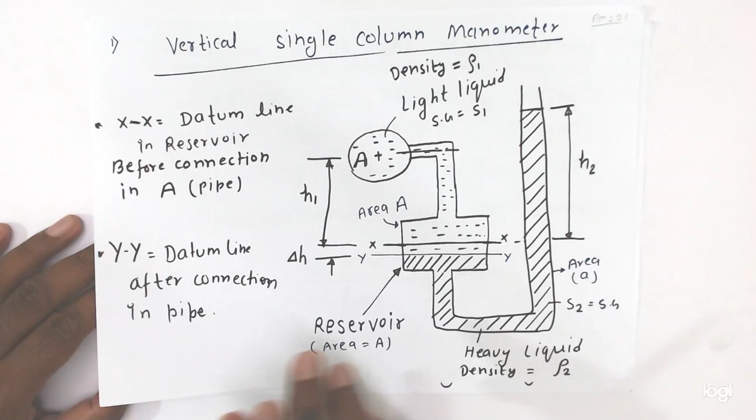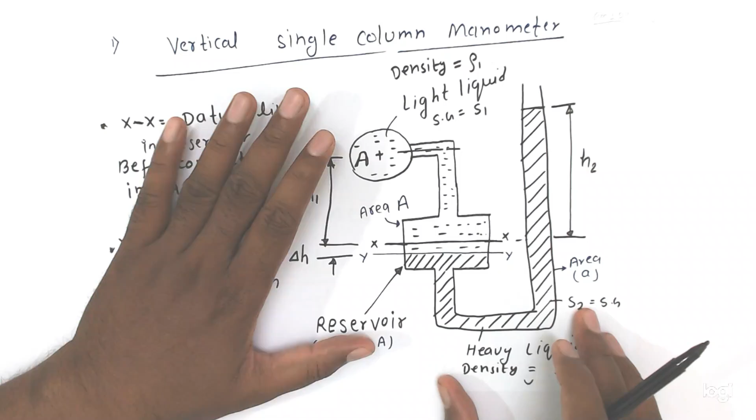Friends, this is the single column manometer. In this, आप देख सकते हैं, this is the pipe, connected to a reservoir, and it is like this. Friends, this is the modified version of U-tube manometer, this is the U-tube manometer.

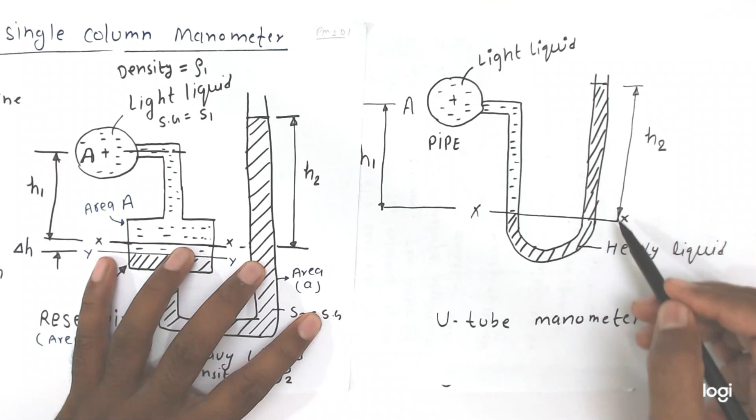From here you can see this is the U-tube manometer. This is the pipe which is connected here. This is the light liquid, this is the heavy liquid. Like this arrangement is there.

This is U-tube manometer. Friends, for accurate measurement or precision measurement, we are using this single column manometer, and it is the modified version of U-tube manometer.

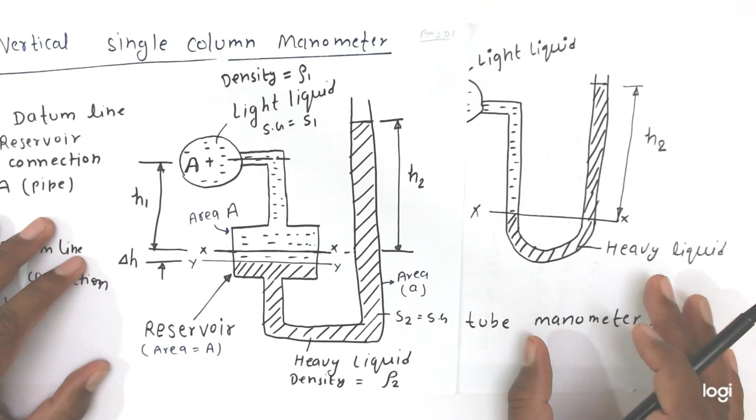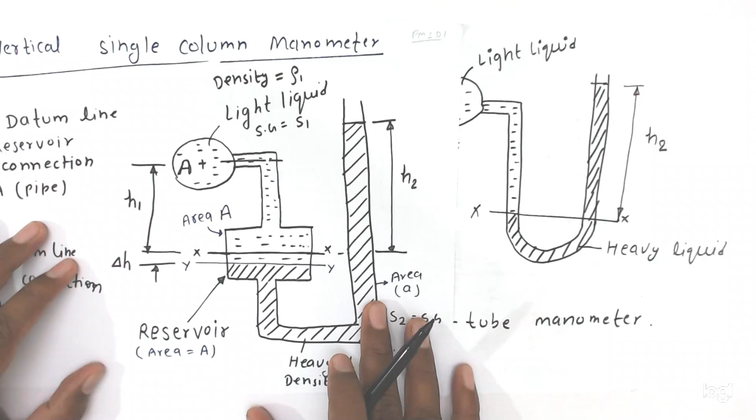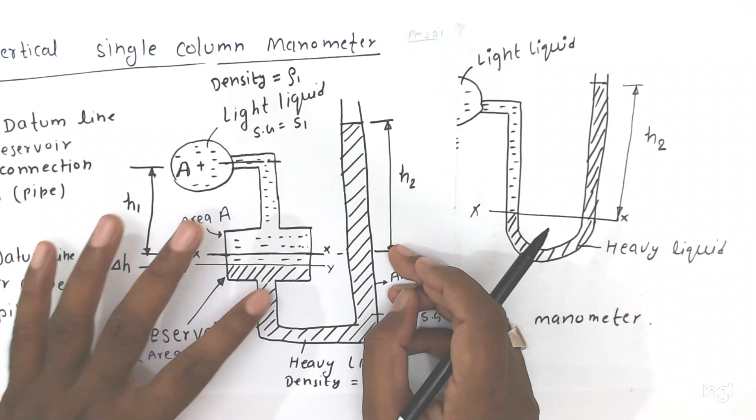Here what happened, friends, we will fix one reservoir like this in the left limb, and right limb is like this only. क्या होगा, पाइप से एक लिम्ब में एक रिजर्वायर फिट कर देंगे जिसका एरिया राइट लिम्ब की एरिया के अप्रोक्स 100 टाइम्स या मोर देन 100 टाइम्स होता है इस रिजर्वायर का। ओके फ्रेंड्स, सो दिस इज द सिंगल कॉलम मैनोमीटर।

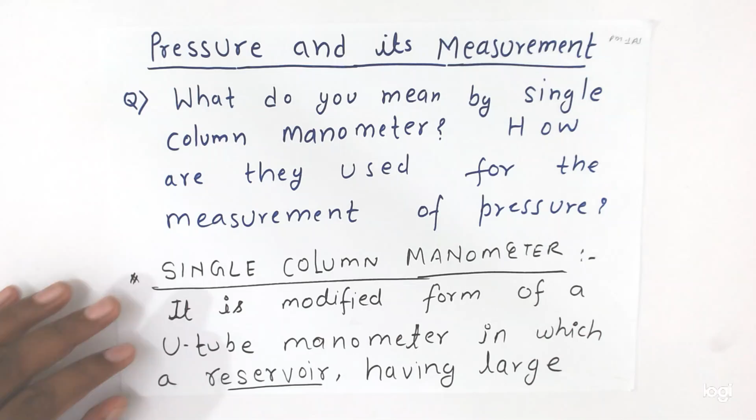नाउ फ्रेंड्स, वी विल अंडरस्टैंड हियर। इट इज द मॉडिफाइड फॉर्म ऑफ अ U-tube मैनोमीटर में जिसमें एक रिजर्वायर जो large cross section, more than 100 times as compared to the right limb or other limb, is connected। ओके फ्रेंड्स, due to large cross section लगाने से क्या benefit होगा?

Due to large cross section area of the reservoir, for any variation in pressure, the change in liquid level in the reservoir will be very small। फ्रेंड्स, अगर हम इसका एरिया बहुत लार्ज कर देंगे तो अगर कुछ भी चेंज होगा तो इस कॉलम में जो चेंज इन प्रेशर होगा वो बहुत ही कम होगा।

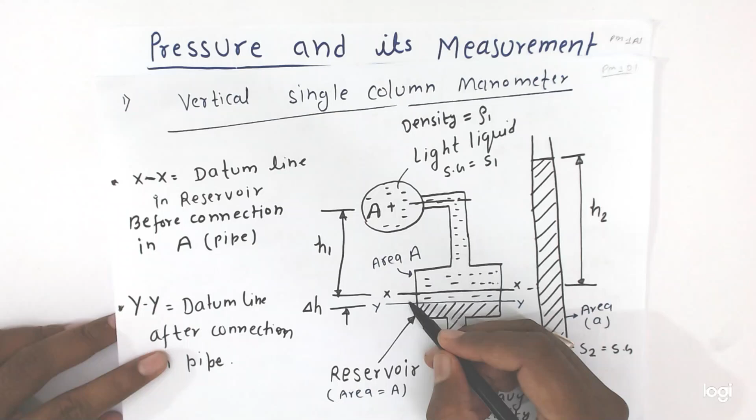ओके फ्रेंड्स, यहाँ पर जो लिक्विड लेवल का वेरिएशन होगा वो बहुत कम होगा इन द रिजर्वायर, द चेंज इन द लिक्विड लेवल इन द रिजर्वायर विल बी वेरी स्मॉल which may be neglected, and hence the pressure is given by the height of liquid in the other limb।

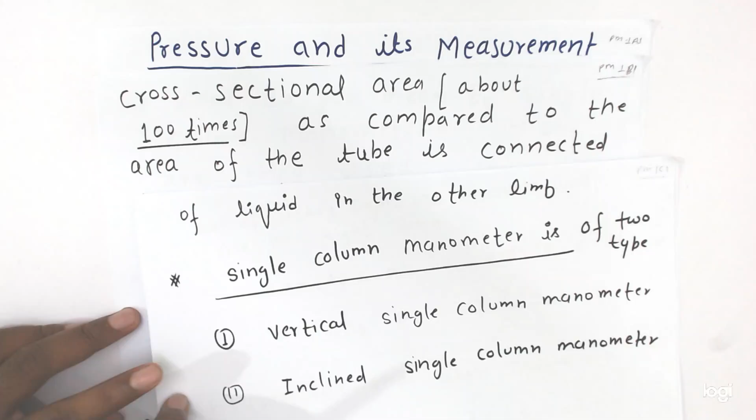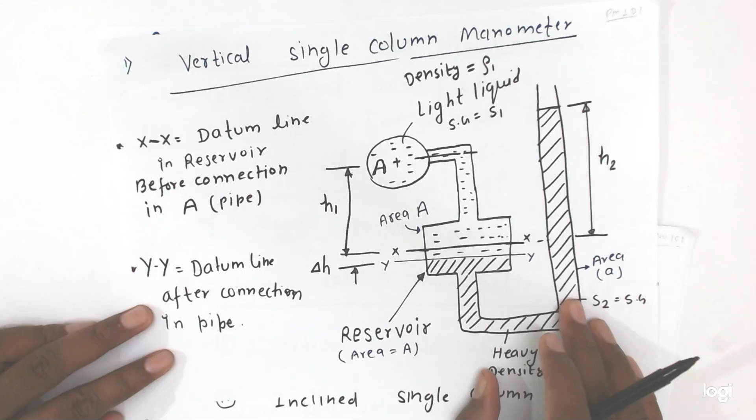फ्रेंड्स, क्या होगा यहाँ से कि इस केस में जो हाइट होगा वो बहुत ही कम होगा, चेंज इन लिक्विड हाइट वेरी वेरी स्मॉल, सो वी कैन नेग्लेक्ट इट, एंड जो भी प्रेशर होगा वो इसके द्वारा हम कैलकुलेट कर लेंगे। सो दिस इज द एडवांटेज ऑफ दिस सिंगल कॉलम मैनोमीटर।

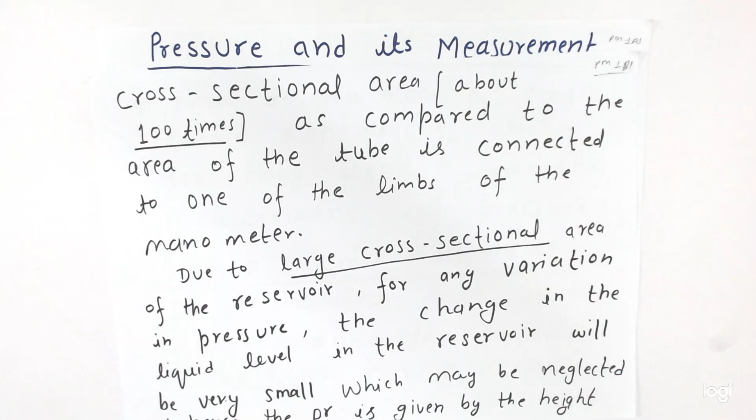ओके फ्रेंड्स, दिस इज ऑफ टू टाइप्स। Single column manometer is of two types। One is vertical single column manometer, and this is inclined single column manometer।

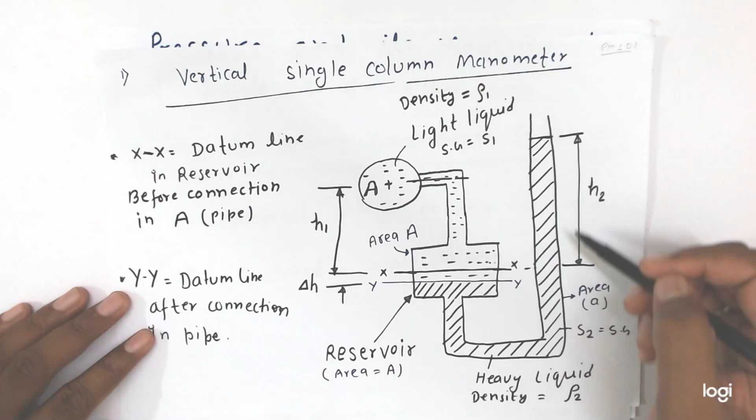So friends, this is the vertical single column manometer. In this right limb is in vertical. फ्रेंड्स, इसे हम प्रेशर मेजरमेंट कैसे करेंगे? Let's suppose first we are not connected this part to the pipe.

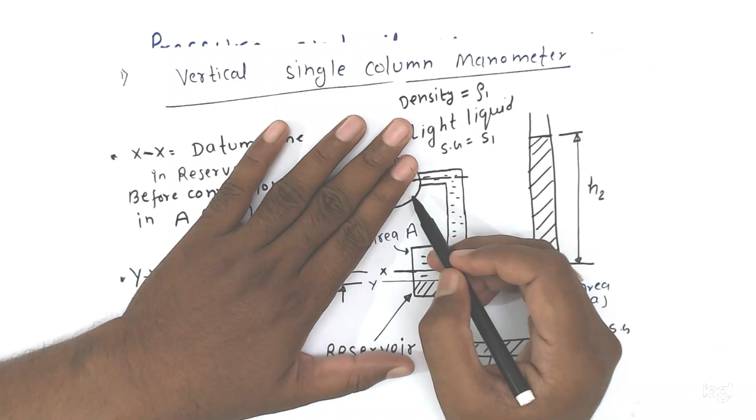So in this case, whatever bottom line is there in the reservoir is XX before fixing into the pipe. Okay friends, we are not fixing anything. So before fixing, whatever level is there, this bottom line is there, it is XX.

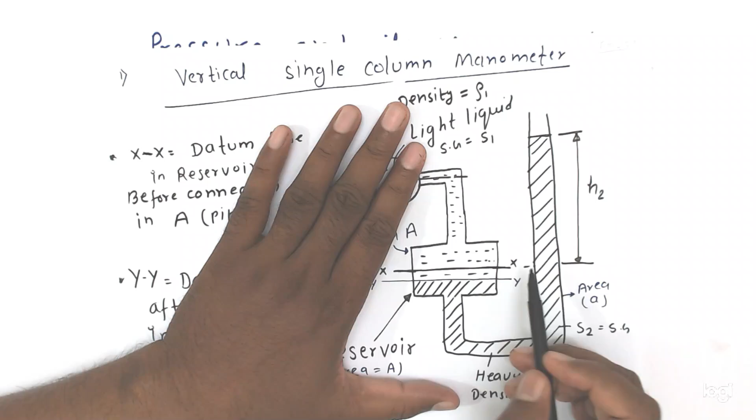Now friends, this part is connected to this pipe. In this case, due to the pressure of the liquid, this level will go down, and because of this, whatever liquid rises there, it is H2 in the right limb. So XX is the datum line in reservoir before connection in pipe, and YY is the datum line after connection in the pipe.

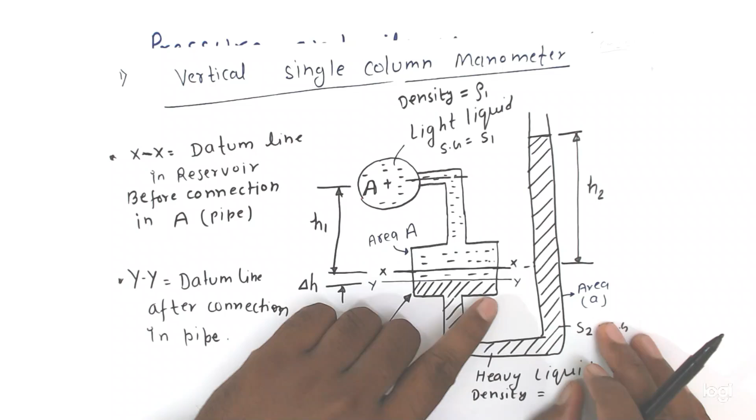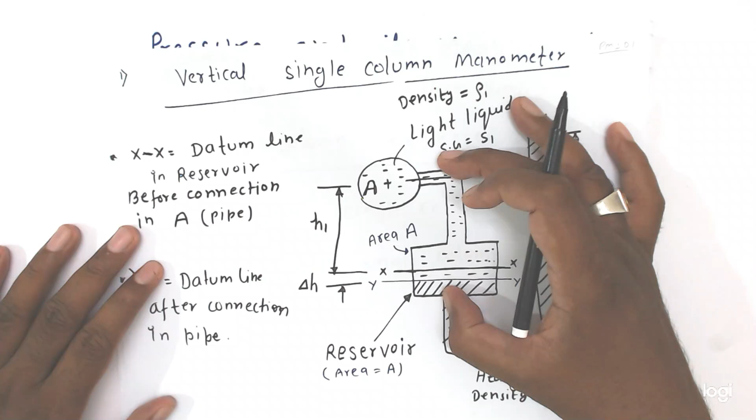So इस कनेक्ट करने के बाद जो हमारा डाटम लाइन आएगा वो YY होगा। फ्रेंड्स, प्रेशर कैलकुलेशन कैसे होगा? Whatever pressure is in the left limb, that means pressure is in the right limb. So friends, this part is also delta H।

ओके फ्रेंड्स, now see here, whatever fall is there, जो वॉल्यूम डिस्प्लेस होगा यहाँ पर, सेम वॉल्यूम राइज करेगा। इट मीन्स यहाँ से जो वॉल्यूम होगा वो डाउन होगा, और उतना ही वॉल्यूम इधर राइज करेगा। इट मीन्स फ्रेंड्स, यहाँ पे area into delta H equal to whatever area is there in the right limb into height H2।

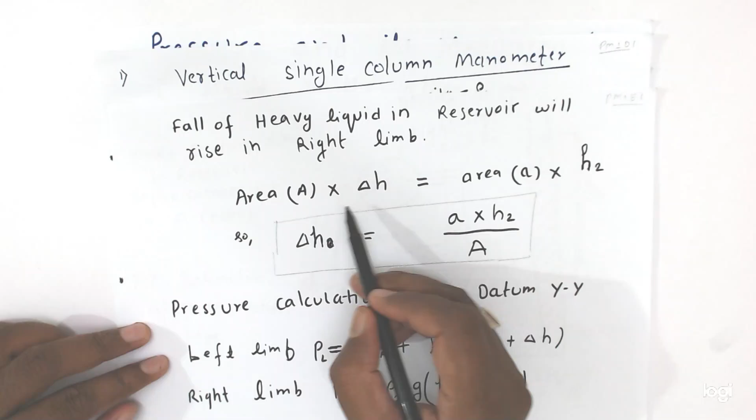Okay friends, so this is the concept here. So fall of heavy liquid in reservoir will be rise in the right limb. So area into delta H equal to this small area. If small area of the pipe is A and here area of the large reservoir is A, so इस केस में क्या होगा फ्रेंड्स, A into H2।

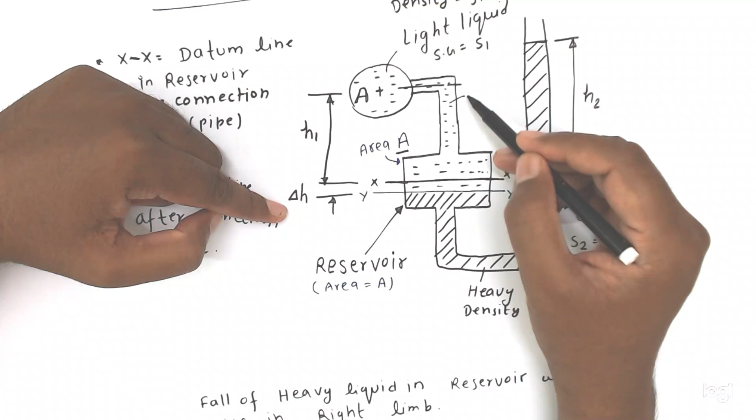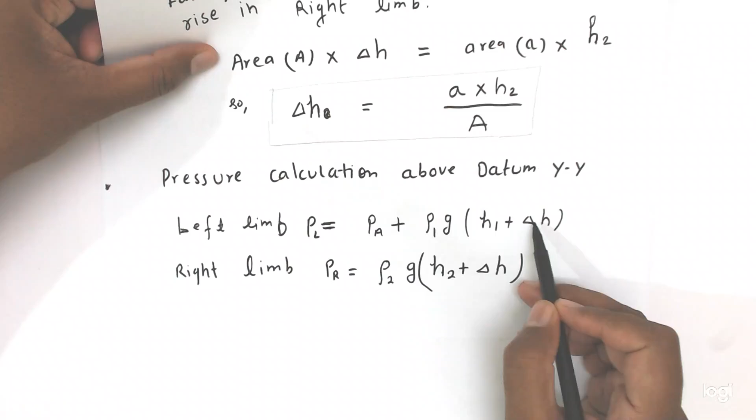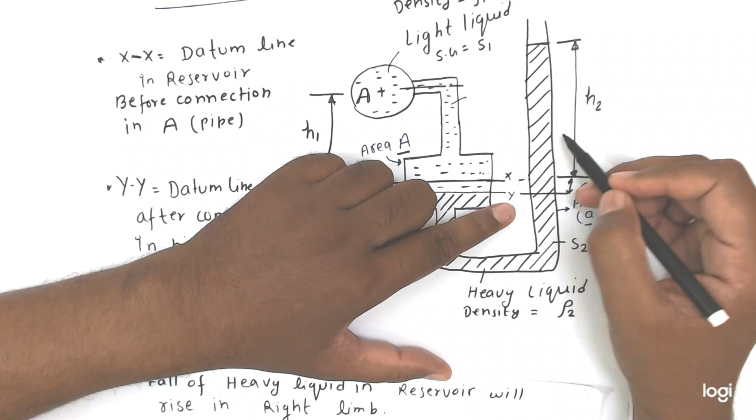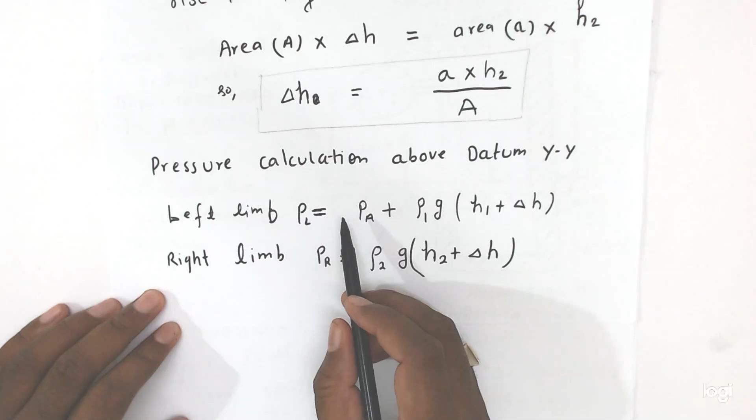If density of this liquid is ρ2, so ρ2 G into H2 plus this also height, because this is the datum line we are considering, so delta H plus H2. Okay friends, so right limb pressure is equal to ρ2 G H2 plus delta H. Okay friends, now this both pressure is equal, so we will equate this one.

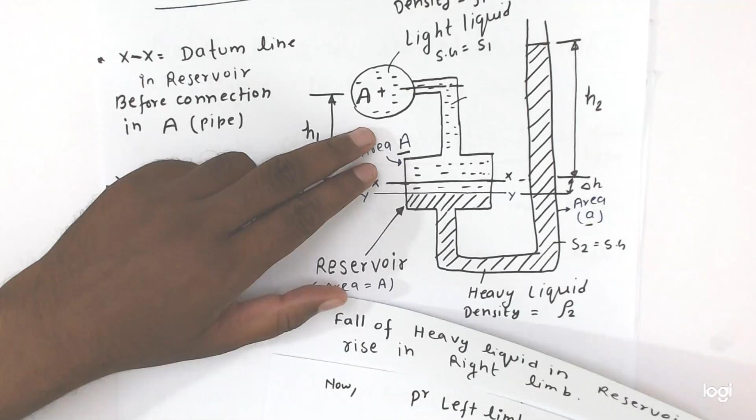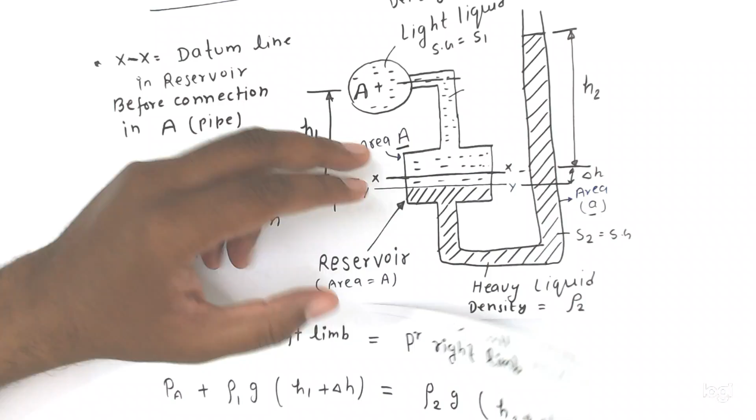So from here we can calculate the pressure in the pipe. So from this we can calculate the pressure in the pipe. Now friends, suppose this area of reservoir is more than 100 times compared to this area in the right limb. So friends, this a by A ratio is very small.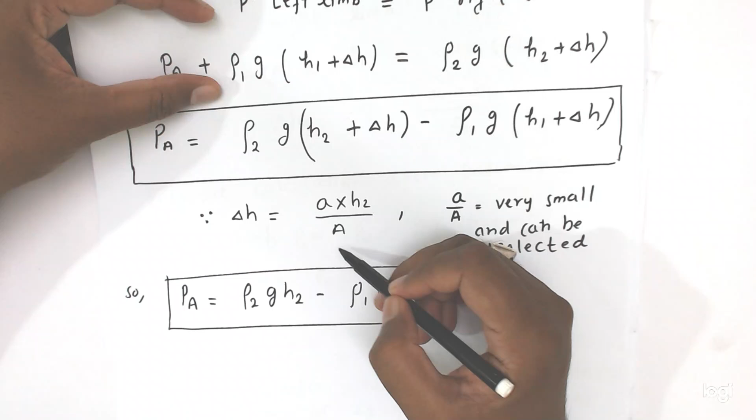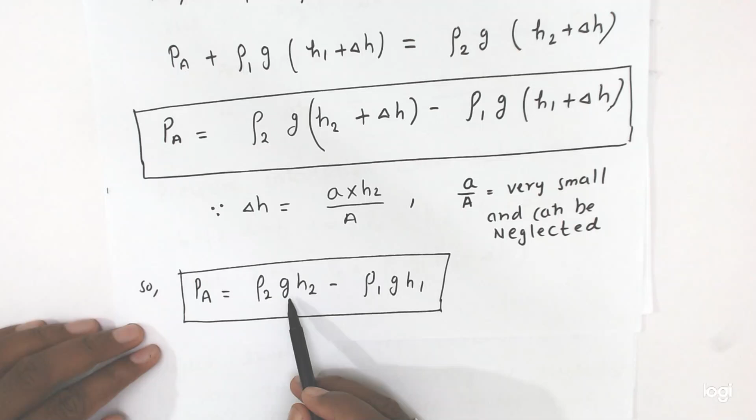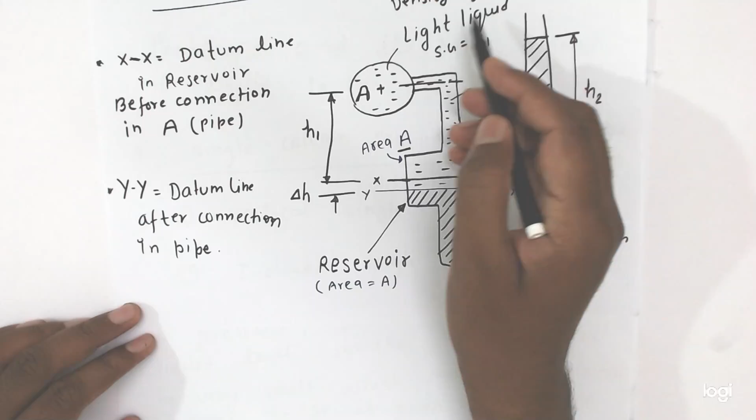ρ2 G H2 minus ρ1 G H1. So by this we can calculate the pressure in the vertical single column manometer. Okay friends. Similarly friends, one more is there. This is the inclined single column manometer. So similar case friends, this right limb is inclined.

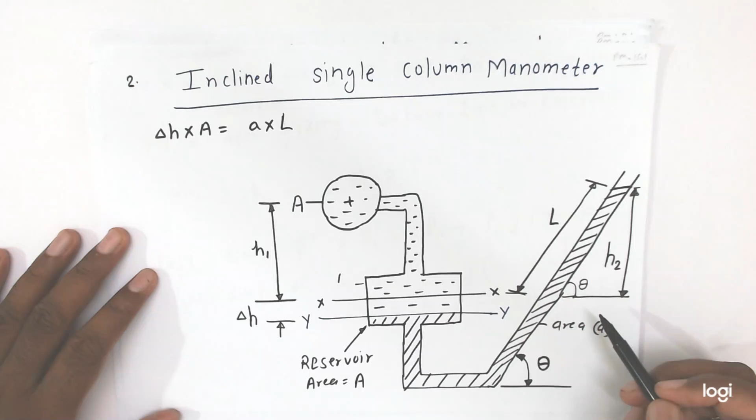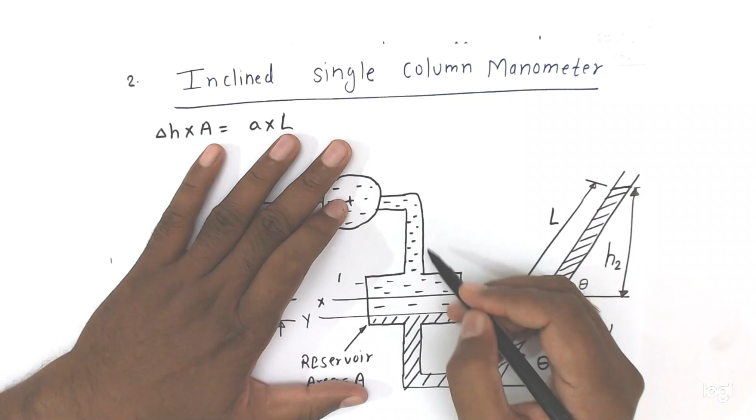This setup is same. This reservoir is in the vertical limb, left limb, and this is the inclined. We are taking this one friends because this is more sensitive and it is giving more accurate results. So here similar case friends, before connecting to this pipe, the datum line is xx, and after fixing this pipe, because of the pressure of the liquid, the new datum line is yy.

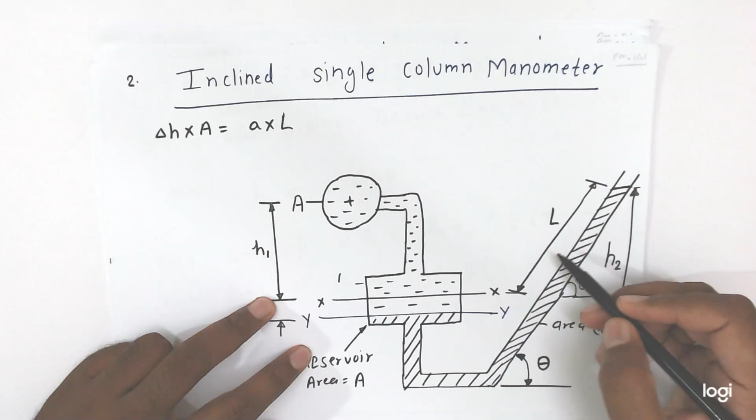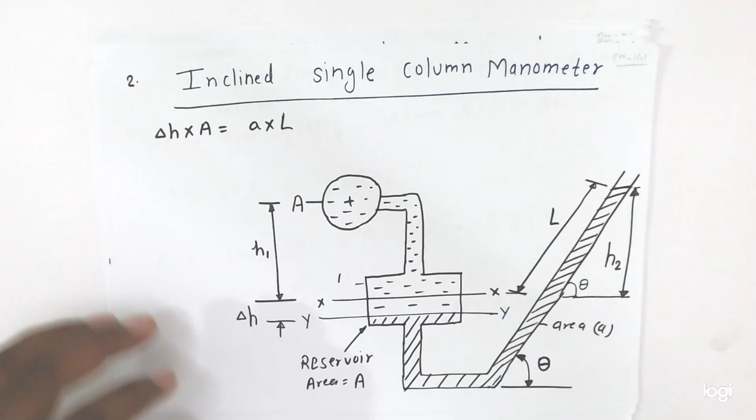Okay friends, this is the delta H. From here the height is h1, and this is inclined. Because of this incline, this length is L, and if you take the vertical height, it is h2. So similar case friends, from here we are able to calculate the pressure. The concept is that this h2 height is equal to what?

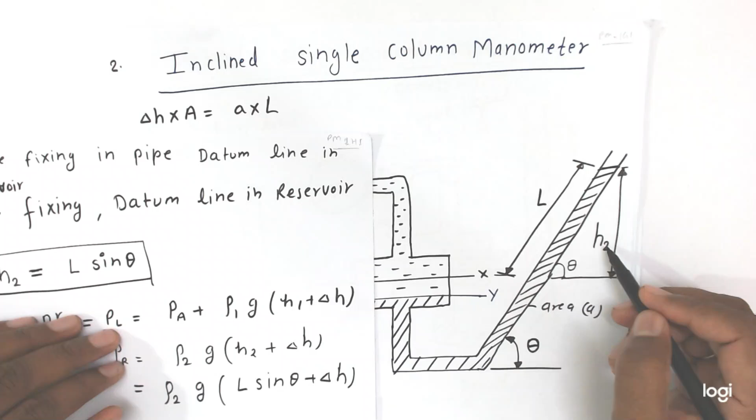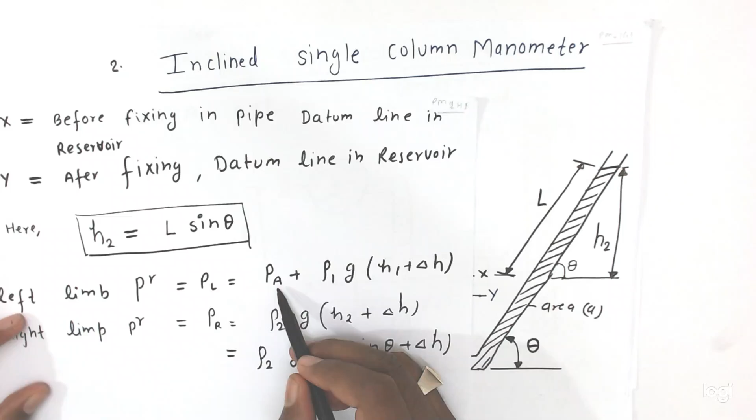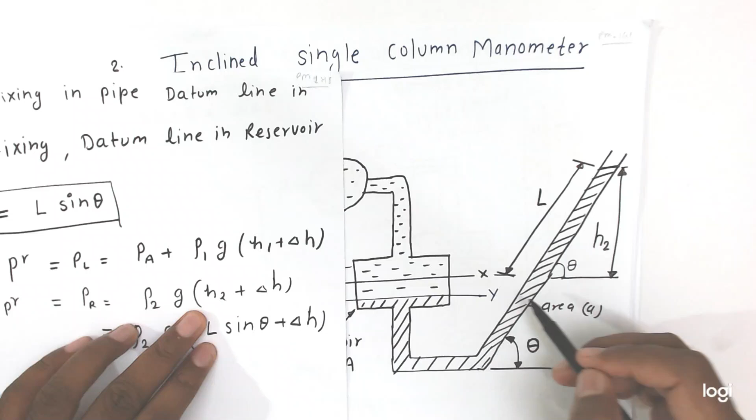h2 is equal to L sin theta. If this is theta, in this triangle this length is L, this height is h2, so sin theta is equal to h2 by L. So we will take h2 equal to L sin theta. So left limb pressure is PA plus ρ1 G H1 plus delta H, and right limb pressure is equal to ρ2 G H2 plus delta H.

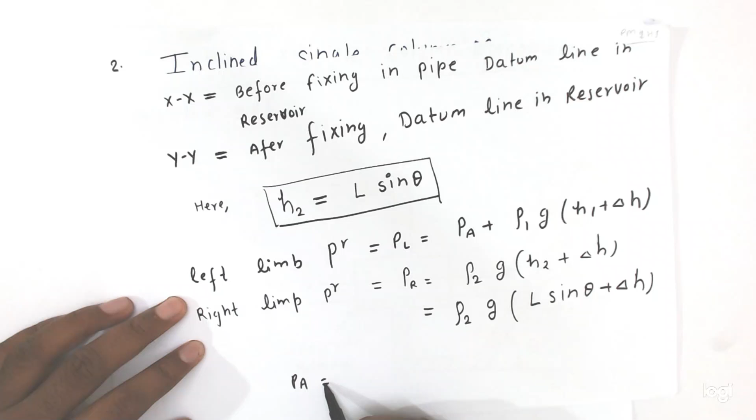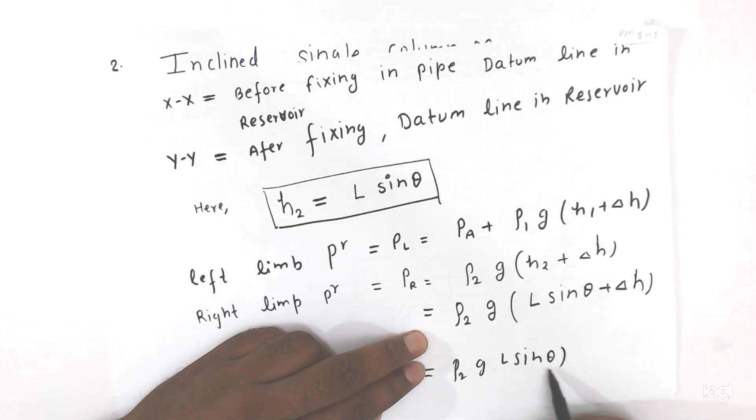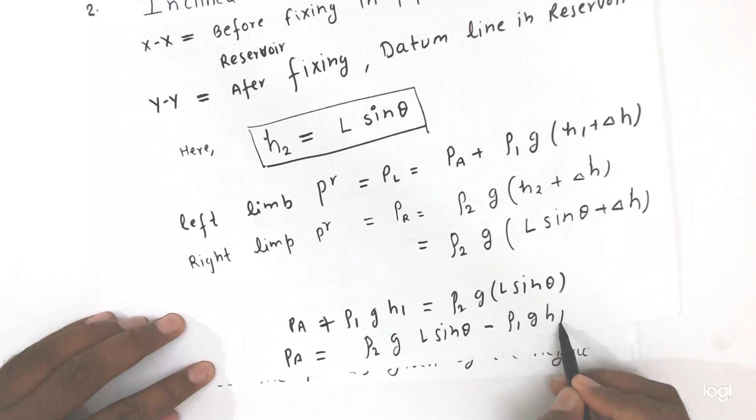This is the delta H. But here this delta H value is very less, so we will neglect this one. So PA plus ρ1 G H1 equals the right side pressure ρ2 G L sin theta. So PA equals ρ2 G L sin theta minus ρ1 G H1. From here we are able to calculate the pressure in the inclined single column manometer.